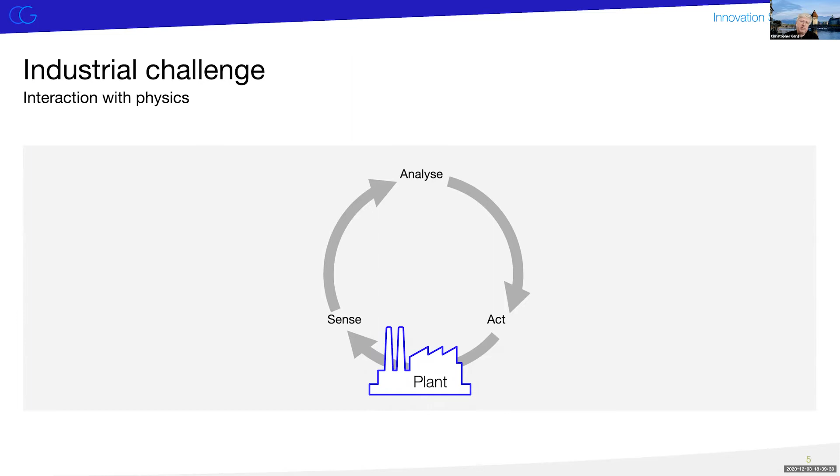So today, many plants are run by automation systems. And these are pretty much always the same. They have sensors installed. In some plants, it's thousands of sensors that measure pretty much everything that you need to control. Then they analyze the signals, and in the end, you put some action back to the plant. And there, between the sense and the act, you have the physics of the plant. And I think that is one aspect that we're dealing with. We're dealing with the physics.

So automation is measuring things, is analyzing, and typically it's analyzing what is different from what I expected it to be. And then you have some actuators, you have pumps, you have valves, you have conveyor belts, you have robots, whatever. And then you act on these so that they put the plant at the state where you want it to be. That is state of the art currently of an automation system. You have these control loops, which are either continuous, so this type of loop, sense, analyze, and sending the signal back to the plant happens continuously. Typical cycle times are 1 second, half a second, 100 milliseconds. And very fast ones might go to microseconds when it's about electrical systems.

Or you might have discrete control loops where you have a triggered event, for example, when a tank is reaching the full sensor, then you open a valve so that it gets slower, or other discrete events that trigger an action that interfaces with the plant. So the key here is you're dealing with the physics of the plant. So you are interacting, you're sensing the physics, the reality, and you're acting back on the physics.

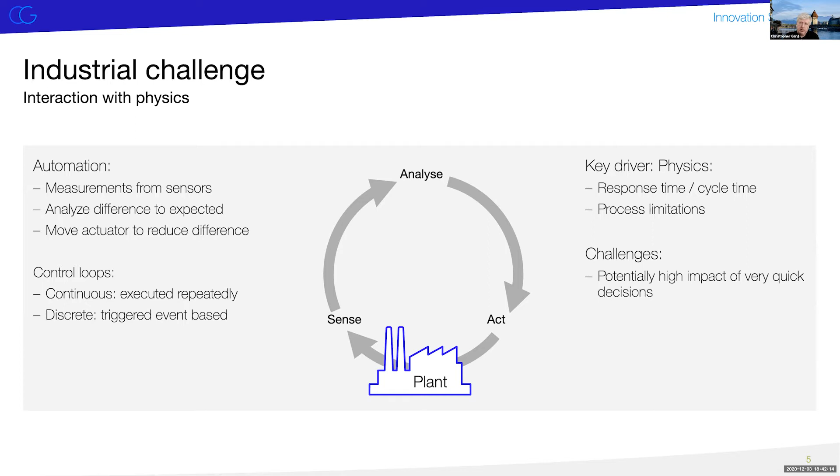So what does that look like? Today, for the critical safety-relevant processes, you have this dangerous area where with a false negative, if you don't detect even one single dangerous situation, you're in trouble. So you design the system so that it covers a little bit more than what's absolutely necessary. So you rather define a larger coverage space, kind of better safe than sorry, and you shut down a few more times than would be necessary to really prevent danger, but rather not miss one of these dangerous events. The false positive, if you're detecting something that's actually not there, impacts the plant availability, which is of course not good, but at least nobody gets killed.

In the non-critical, where you're improving the effectiveness, the undetected event is less critical because today these tasks are done by operators. So humans that sit in front of the screen and act on the plant, and they run the plant up and down and think this is the best way of operating it.

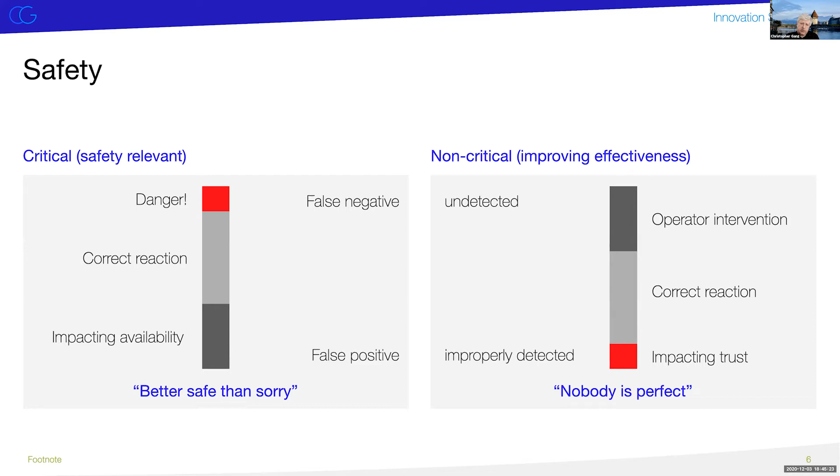So this nobody is perfect approach. The system can just be a little bit more perfect than the operator, but it should never be less perfect than the operator. So given today's capabilities of AI, where you cannot guarantee the reaction of a system, particularly when it's outside its training set, I would not recommend to use it in a critical environment as the last resort for reaction. However, the non-critical, to improve the effectiveness, that is actually the place where we're seeing AI solutions being applied today.

Of course, you can take care of that in some way. So AI in industrial systems has to be looked at in the context of the plant. So there's today still always an operator there, and AI is mostly used to support the human. Very good examples are perception, image recognition, video, sound recognition, and all these, where you can tell the operator something that he cannot see or grasp with his senses. Those are very good use cases.

Data interpretation: large plants have 7,000, 10,000 signals. To figure out what's going on is pretty tough. And if you can have AI to kind of cluster data, manage alarms, which one was the most important alarm and all that, and then still leave the decision to the human, this is a good area.

Condition monitoring and failure prediction is also good because it's very well suited for the fundamental functioning of a neural network. You have a set of input data, basically the measurements, and the result is: is the device okay, or is it not okay? It doesn't have a direct impact on the plant, because once you see that something is not going well, you still have the maintenance crew to look after it. You can go to that device that the system tells you is faulty, and confirm the finding of the system.

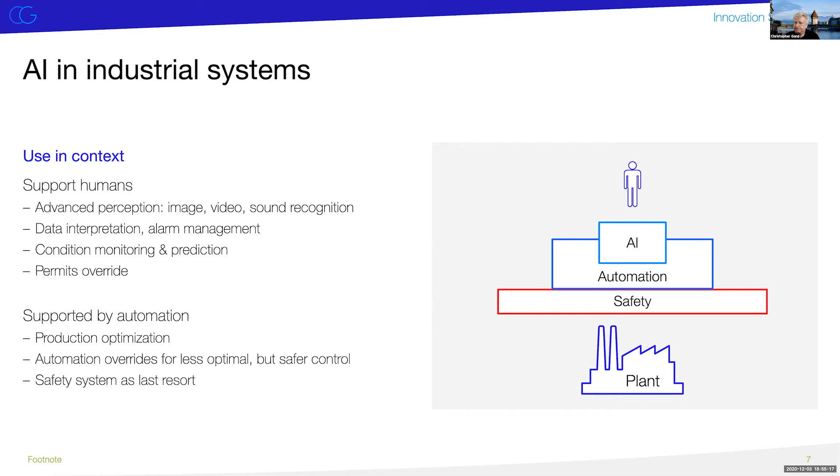So as usual in machine learning and AI, data is the key problem here. Garbage in, garbage out. I guess you all know that. And when it comes to data, industrial applications are somewhat special. We are seeing many applications of AI dealing with consumer data, personal data. What you put into Google, into Facebook, and all that is being analyzed.

The reason for that is because the companies would like to assess your behavior. Your behavior is pretty unpredictable and not really controlled by any physical laws. So therefore, you need to resort to data-driven algorithms and make sure that you get some kind of understanding how the average person is behaving in such a situation.

In industry, it's very diverse. I've had some discussions with IT companies that told me, well, there are billions of sensors in the IoT, and you have tons of data. Well, yes, we do, but some of this equipment is custom built. For example, a large power transformer, you get a specification from the customer, and this is built exactly 5 times for this one plant that has 5 transformers.

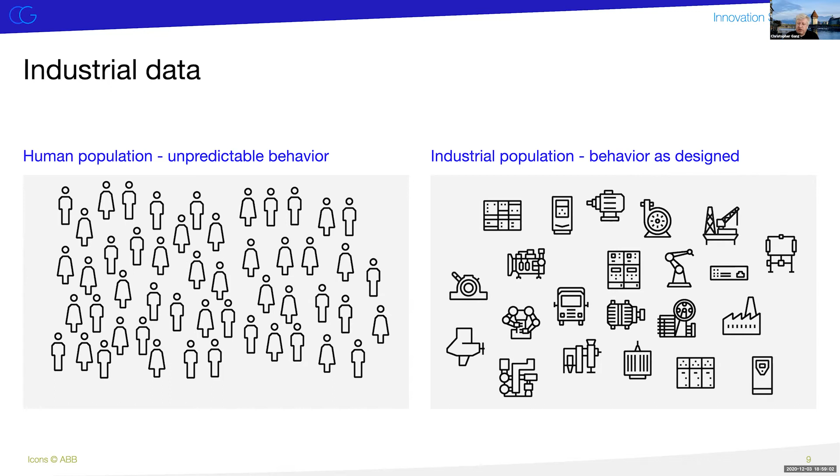Perfect, Christoph. Okay, so you have a very diverse population, and you should actually know what this population is doing, because this has been designed by engineers. So the physics of a robot is pretty well defined, and we know pretty well what that robot should be doing when it's operating normally. So we are actually interested in what we don't know.

And here I have another challenge. The data is, we collect tons of data, terabytes of data. First of all, the data is just reflecting the physics. So if a plant is absolutely running correctly as designed, then we know why the signals are the way they are, because we designed it that way.

So another aspect is, if a plant is running steady state base load, the power plant, the refinery, these plants might run for months on the same set point, always producing the same amount and the same quality. So you look into the plant today and you see a set of temperatures, pressures, and material flows. You look into it tomorrow, you see exactly the same data set, tiny little variations. You look into it the day after, in a week from now, you always see the same information. So you do collect a lot of data, but it does not contain any new information.

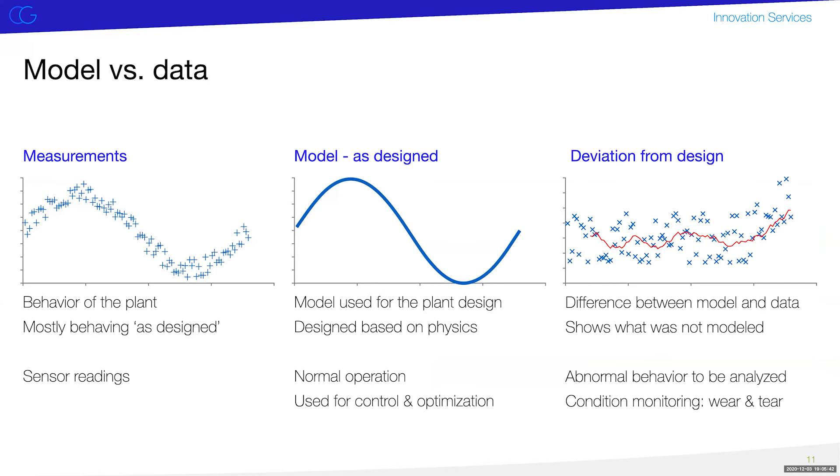Hi, I'm asking about the unbalanced situations, because as you said in your previous slide, you mentioned a lot of normal situations and just a few abnormal situations that are of interest. So how do you treat that data? Because for modeling in machine learning, it's better to get a balanced data set. So probably in this case, you need to focus just on these special situations. And how do you model for this? Maybe using an example in time or in a timeline or something like that.

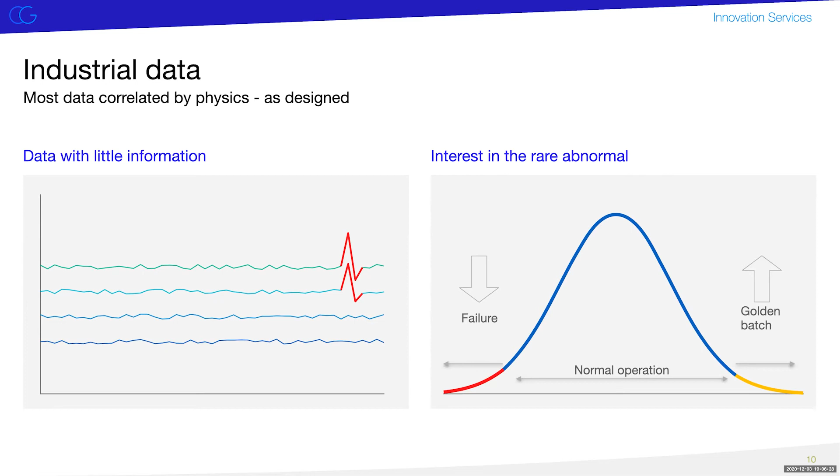Well, you're right. You actually put a lot of effort into collecting the interesting data. Now, another problem is that industrial devices have been designed to last very long. So you don't want failures. And we put a lot of effort into designing equipment that lasts uninterrupted or shows very little failures. So therefore, you need to increase your sample set. You need to cover more devices. So you need to collect information from motors from all around the world so that you catch some of these special cases. And then there are some cases where there are databases of failure cases.

And then there's also, again, with the failures, you know some indications of upcoming failures. For example, in motors, if we're looking at the frequency response of the motor, you know certain frequencies should not appear. So as soon as one of these appears, then you need to look at it. You start collecting data and then you analyze it. But it's a very hard problem. Thanks, Christian, for the question.

Okay, I will dive into an area. I've so far covered the operations, but today we mostly see it in operation and mainly in maintenance. But the industrial plant lives a longer life cycle. It starts from designing, and a lot of the performance of a plant is actually defined when it's being designed already. Once the plant is built, the performance is set. As I mentioned, the plant behaves as built. So if you build it in the wrong way, it behaves exactly the way you build it.

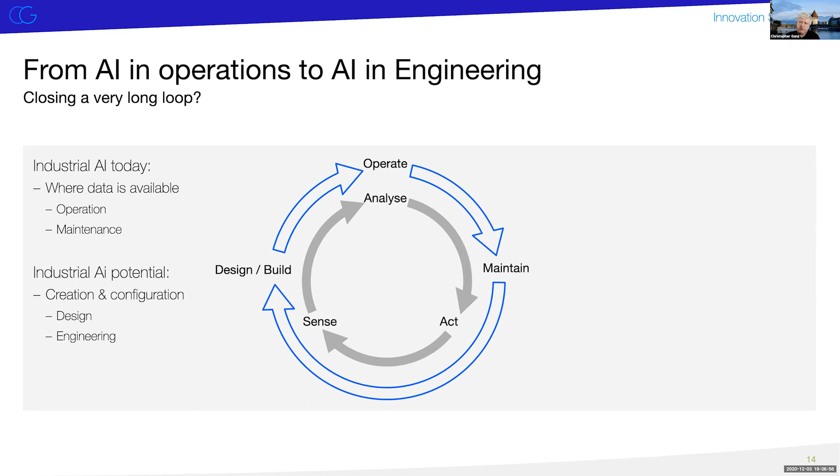So therefore, for process industries, the engineering loop cycle time is decades. You build a plant, and the next plant will be built in 30 years. In discrete manufacturing, if you're building a new type of car, the plant will be re-engineered partly. If you're building a new type of drug, the machines will be reconfigured. So in discrete manufacturing, you have shorter life cycles because the plant is reconfigured once you want to produce a new product. In a power plant, you always generate power.

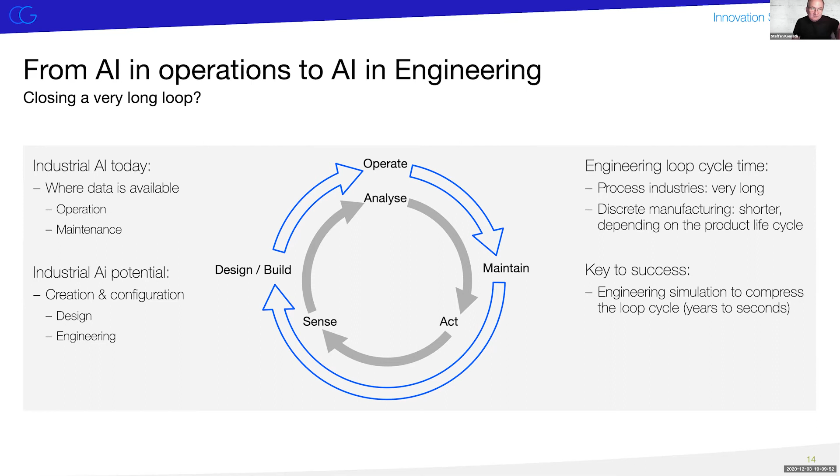So here, the key is to be able to simulate. In many applications, simulation is today one of the standard tools, but that could actually be exploited to create these optimized plants. And I do have an example here that is actually tied to another interesting technology. The traditional way is you have a designer, you get a spec, that blue document up there.

I'll come to that question about the plant.

The design is given to the designer. He's simulating that, he's getting the KPIs, how it's behaving, and then he's doing that over and over again until he reaches his KPIs. In his mind, he has human build capabilities, and you build the product how you would design it. A new generative design approach takes a simulator, calculates the KPIs, and then trains the AI on these properties. Similar to the Go game, the KPIs are the outcome of the game, and you learn how to play the game against the physics of the device.

And then you get very strange looking objects that fulfill the specs. The reason why we can do this now is also because of 3D printing. Now we can build these things and create this type of wild thing. For a human, it's very difficult to design something like that, but the AI-driven generative design solution would actually come to that solution.

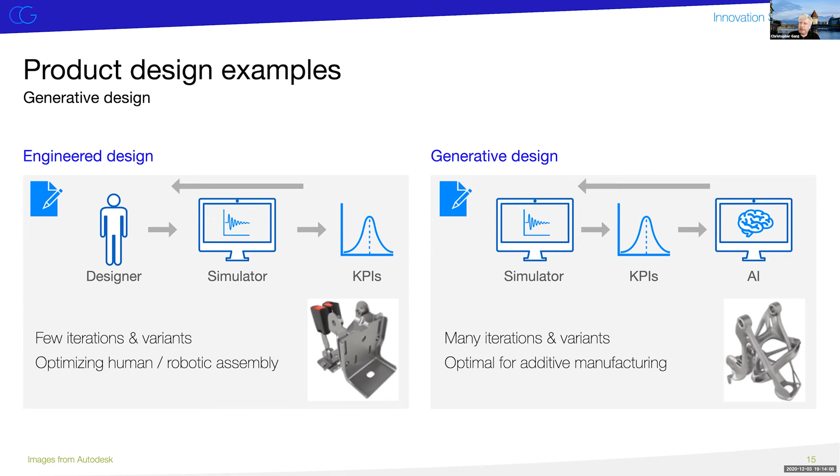Another one also from Airbus, the step for the pilot to enter the cockpit, two steps of metal, normally thick aluminum plates. They were redesigned. There are now two very thin plates with some very fine structures in between that actually increase the strength of this plate. You can reduce the weight a lot, and particularly when less intuitive properties are being optimized, like for example cooling capability, you get very good results.

I personally, when I saw the example from Airbus, I saw that in the past as well. I just stick with the idea that it's possible that a machine comes up with a solution which a human probably wouldn't find. Absolutely. This is the fascinating stuff of it, and it will have a huge impact on some parts of engineering. This is something of major interest. Thank you.

So going further, putting different products together to build a system. Siemens had this problem here. It's an aircraft electrification system, and the best solution known today is patented by Honeywell. So what you do as R&D, you need to find a way around that patent. So they said, let's describe all the components. Let's describe how they behave when they connect. And now let's use such an AI-based optimizer. And it worked.

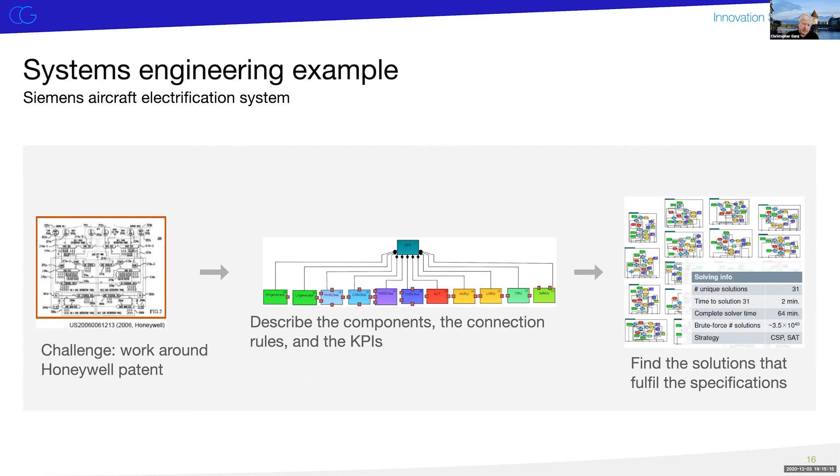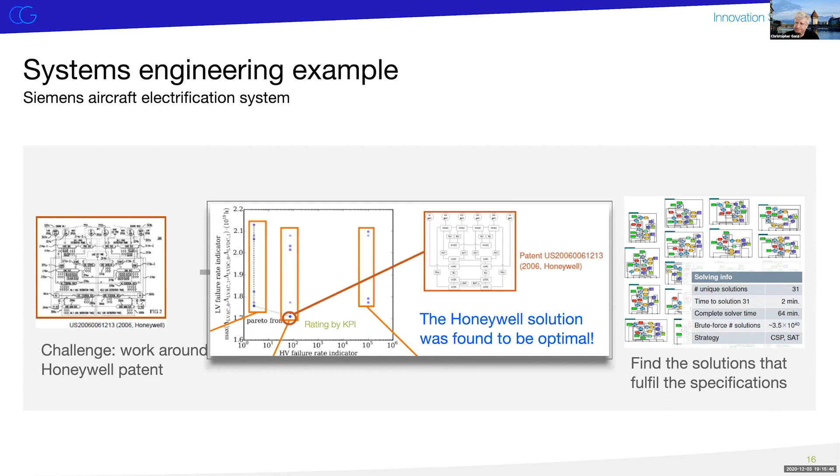The system found a solution that is actually the perfect solution. Too bad the perfect solution is the one patented by Honeywell. So they were able to prove that, yes, the perfect solution is the one from Honeywell. The system was able to reproduce the solution that Honeywell's engineers had come up with. It didn't really help Siemens to find a better solution, but it worked, and it probably works in other cases there.

Now, for these kinds of activities, you need a lot of information other than just what you measure from the device. You need the product type, like the drawings, the design things. You need the information on how it was built, when it was built, in which factory, how it was tested, how it behaved in the test. You need the system's context when the device is integrated into the system, like these motors. Is it driving a pump or a fan? Is it within the plant? Is it exposed to weather and all that?

And then in the end, you have the operations context, and you can measure the condition. In some of the examples I've just shown, it doesn't help you to have the condition only, because a motor installed in a conveyor belt you cannot compare to one driving a fan, even though it's the same motor. So you need to have its application. And that information is typically stored somewhere else.

So here, what actually helps is this concept of digital twin. A digital twin, as we have defined it in the Industrial Internet Consortium, is any digital reflection of a physical asset. And it's important that you make that available to every other user of a digital twin, because maybe they need to know some of these aspects of the equipment.

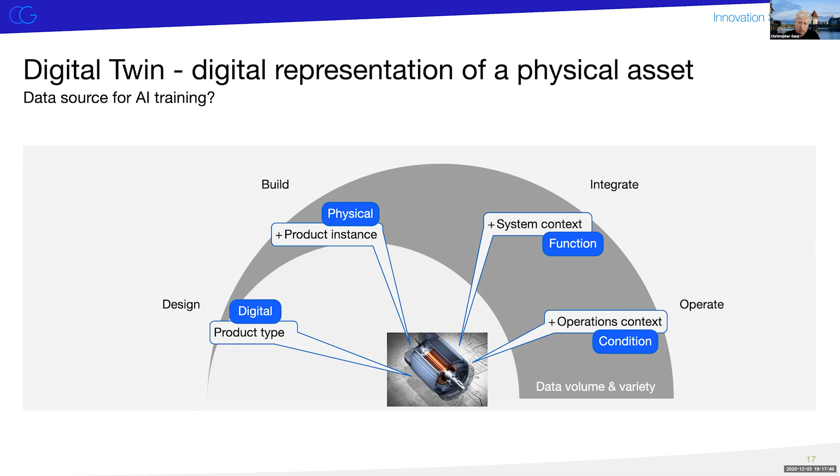Having the data associated with this one piece of equipment is actually crucial for training an AI system, because there are situations where one motor is removed from a pump, replaced by another one, and the removed motor is repaired and put in the inventory. So you need to distinguish between the motor as a driver of that pump and the motor as an individual with a particular property of operation. So you can arrive at fairly complex data situations when dealing with the equipment on site.

I would like to dive into some questions I had recently when writing a paper, triggered by someone writing about how AI will take over the world very soon. I came to the conclusion that probably not so quickly, because the way humans learn is mostly by asking the question why. Those of you who have kids, I don't have kids, but I have a younger brother who always came back and said, why? And this why is actually the source explaining causality.

So you ask why, you get because, and the cause, so you can make your own link between a cause and an effect. You learn the cause and the effect. And that is something that's missing in current machine learning approaches. Causality needs to be in the training set, so it has to be given by the human. It cannot deduce the causality that arises from that question why.

And I think how humans put together all these causes and effects is that we build an internal knowledge network, so that in the end we can answer a question why where we have never seen someone telling us because, but we can trace back through that network to arrive at something that we know. And in many industrial applications, causality is really crucial. If you come to a plant that doesn't work, the first question you get is why?